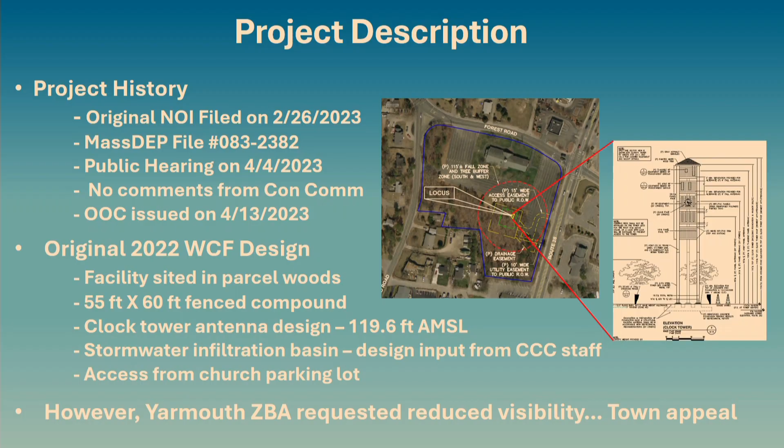What came to bear after is that the Yarmouth Zoning Board of Appeals did request that we reduce the visibility of the facility. In particular, they were concerned about the height and visibility of the clock tower. So with that, Blue Sky Towers went back to the design board and revisited the design.

What we came back with here is a very similar design to 2022. It retains the 100 foot by 100 foot lease area, shown in the yellow box, and retains a 55 by 60 foot fenced compound area shown in green. The infiltration basin hasn't changed in design at all, and access remains from the parking area of the church in the southwest corner. What did change in order to address the ZBA's request for reduced visibility is we shifted the compound facility about 22 feet to the west, which also resulted in going up gradient about 1 foot from the previous design elevation.

The tower design changed from a clock tower design to a 93-foot steel monopole. Total, with the antennas on top, it sits at about 96 feet above mean sea level with the new design. The driveway access into the facility shifted south about 20 feet.

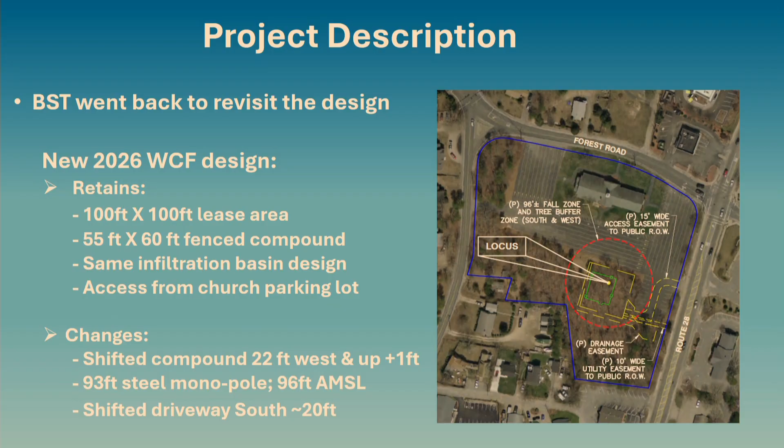This is the new design based on input from the ZBA. You can see the different tower there on the side is not a clock tower design—it's a typical steel monopole design that you see on most wireless communication facilities. The driveway again shifted south of the compound facility.

The stormwater basin is in the lower right corner; that hasn't changed in location at all. The tower itself again shifted about 22 feet to the west within the same footprint.

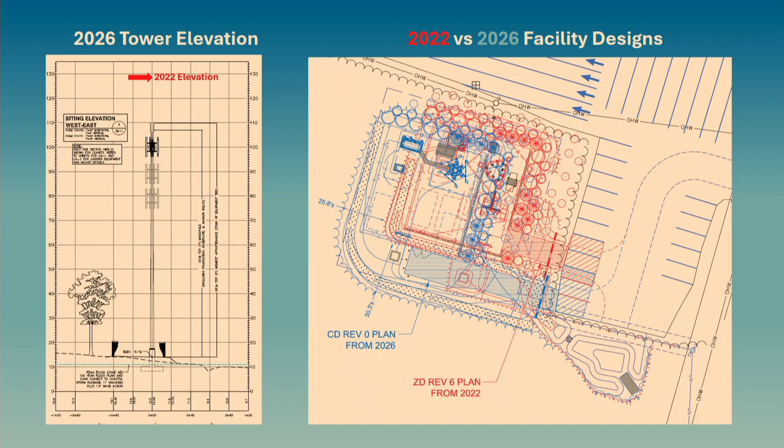Just a quick comparison slide here. You can see the new tower on the left-hand side versus the previous elevation from the 2022 design. We dropped about 20 feet, a little less than 20 feet. On the right-hand side, you can see the revised plan in blue, and it's a bit of a jumble, but everything just shifted slightly to the west from the red, which is the original plan design. You can see the driveway moving to the south of the whole facility versus the red shaded area there. Again, the stormwater facility hasn't moved—it's in the same location.

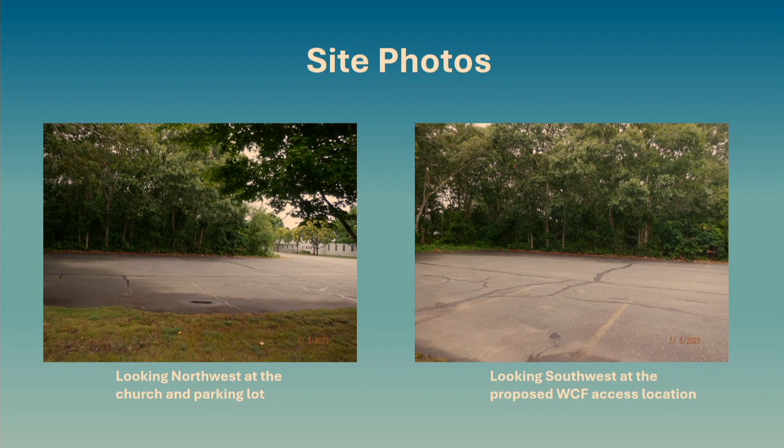Just some quick site photos on the left-hand side. This is the view looking towards the northwest at the church and the parking lot, with the church on the right-hand side. The second photo is looking at where the facility compound access driveway would be located, in the corner of the existing parking lot, heading up into the trees. On the left-hand side, that's where the entrance access way for the facility would be located, the gravel driveway. On the right-hand side is the wooded area where the compound has been shifted up in elevation and, as I said, 22 feet to the west.

Just to recap here in terms of resource areas, we don't have any BVW, bank, bordering land subject to flooding, land under water bodies or waterways, or riverfront area. No rare or endangered species habitat, no vernal pools, no areas of critical environmental concern, outstanding resource waters, or wellhead protection areas. That all remains the same from the original application in 2022.

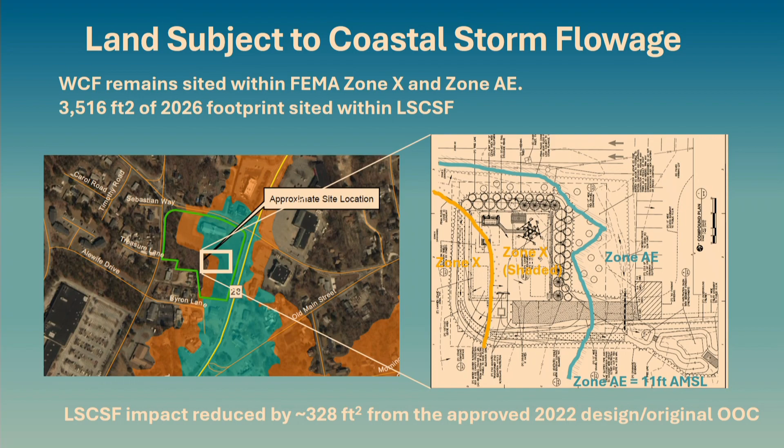Nothing has changed there. What we do have is a portion of the facility remains sited within both FEMA Zone X and Zone AE. So we have about a 3,500, slightly larger than 3,500 square foot footprint that remains within land subject to coastal storm flowage. However, due to that shift to the west, that impact area has been reduced by about 330 feet, just shy of 330 feet, from that original 2022 design that was approved.

Again, just to recap, the design shifts west and upwards about 1 foot, reducing about 330 feet of impact to the land subject to coastal storm flowage.

Stormwater management that was proposed is the same as the 2022 design. Again, that was designed with the Cape Cod Commission's review and input and consistent with their regional policy plan. It has an infiltration basin designed for the 25-year, 24-hour storm event, with no impact proposed on flooding in the 100-year event.

It's designed to treat the first inch of stormwater runoff through exfiltration through the bottom of the infiltration basin. 80% of all total suspended solids will be attenuated and removed. Again, the design meets the Cape Cod Commission's policy, in particular WR 1, 2, and 4, which looks to protect groundwater, freshwater resources, and stormwater water quality.

And again, same sediment and erosion controls and construction BMPs that were proposed in the 2022 NOI. This includes construction entrance, dewatering basins, concrete washouts, and sediment and erosion control that will be maintained during construction.

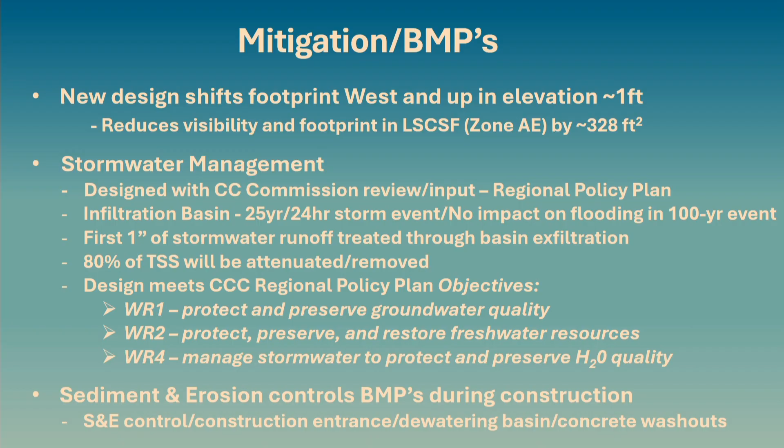Just to summarize, the project will enhance wireless service coverage for the public and emergency services. I'm sure after this past winter you can appreciate the importance of that. The new design addresses the ZBA's and the town's concerns about visibility by pushing the project further up into the wooded lot and reducing the tower height.

Again, no resource area impacts other than the land subject to coastal storm flowage. Similar to the previous application, we've been able to reduce that impact about 330 feet with a new design. Stormwater design meets the regulatory requirements consistent with the Cape Cod Commission's regional policy plan. We have construction BMPs in place, and based on this new design, we achieve the applicant's goals, provide the service, increase service area coverage, and simultaneously meet the interests of the WPA and local bylaw.

And with that, applicant Blue Sky Towers respectfully requests the commission approve the request to amend the existing order of conditions. And with that, I will open it up to any questions or discussion from the commission.

Anybody have a question? Go ahead.

I just have a quick one, for due diligence, since the site was shifted a little bit into the existing hardscape. There's an open-ended note in the documents I want to make sure is okay. It's in the general site work notes, and it says all existing and active sewer, water, gas, electric, and other utilities which interfere with the execution of the work shall be removed and/or capped, plugged, or otherwise discontinued at points which will not interfere with the execution of the work, subject to approval. I just want to make sure, since I don't have utility plans, that there are no surprises underground that would impact excavation or make this work more involved than currently shown.

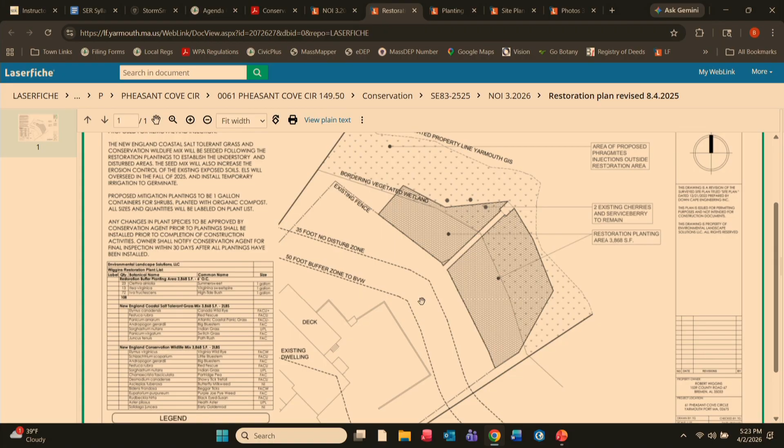So it's a small addition, and it's well mitigated. The boardwalk, our narrative went through it. It would require a variance to retain it, because you don't really allow structures in the V zone.

So we know it's a tall ask, but when you look at it, it's a pretty benign little boardwalk. We feel that by avoiding muddying up that area by walking on it, it probably does more good than harm, especially when weighed against the amount of mitigation that you're getting in return. So that would be the request, and I'd certainly be glad to go through any of the points and answer any questions.

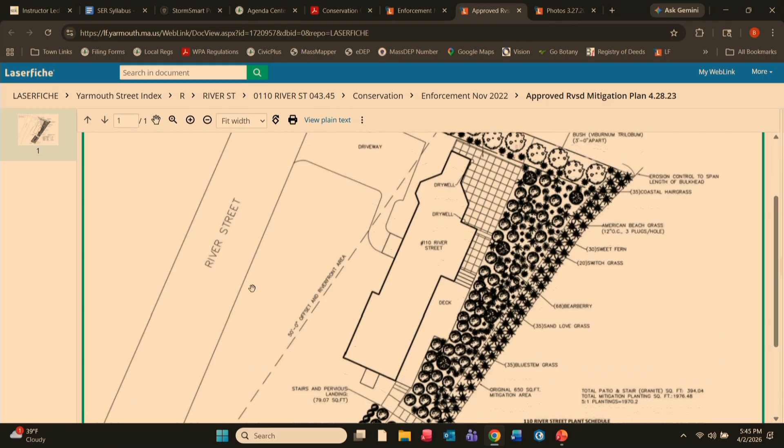The top two rows are missing, so it has to be planted fully, not just maintained. That's from 2023, and he's missing monitoring reports, so we'll need monitoring reports for two falls, this fall and a subsequent one, since he'll have new plantings, in order to resolve the enforcement order. So he still has work to do? Yes, we're missing some plants.

Okay, let me work with you on that separately. You see the landing here? These two rows on top are missing. It's about 10 shrubs and some grasses, a row of shrubs and a row of grasses just needs to go in to complete it. Then just let it go, don't need anything else. Two falls of monitoring, since he hasn't done any monitoring yet.

But you're approving the COC then? Well, yeah, the COC was just for the bulkhead replacement, so I don't have an issue with the COC. Now I understand, okay, thank you. And you wanted to have the plantings done by June 10th? Yeah, they should go in this season since it's a couple years old, to finish it out. So to be clear, what we're voting on is the COC for the bulkhead, and the other is just discussion and needs to be done.

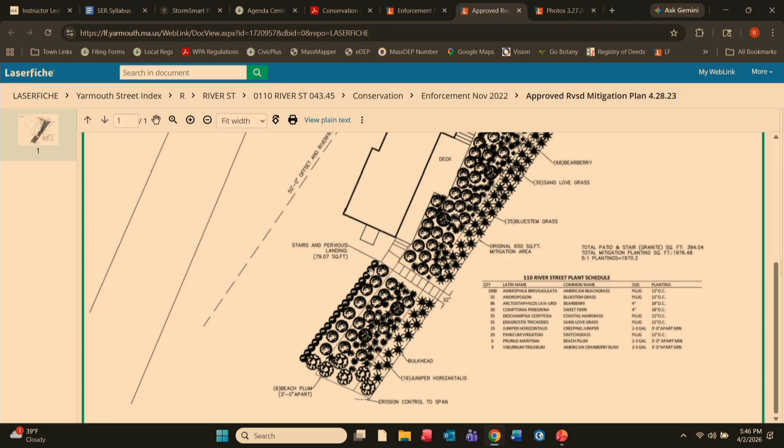Okay, do you have any questions? No, go ahead. I'll move the approval of the proposed reconstruction of the failing bulkhead with conditions. Do I hear a second? I'll second. Christian, aye or nay? Aye. Aye. Aye. Aye. Aye. Thank you, I vote aye.

See you in a little bit. And Brittany, oh, you can stay. The next one's continued. I'm sorry, what? You can stay there, the next one's a continued item. Oh, I had you back to back theoretically. Okay then, see, we're getting through this just for you. Did I mix this up? Oh, I did. Oh no, I didn't. No, you didn't, you're okay.

All right, next is SE 83-2514, Crawford Land Management for Scott Peterson, 10 and 20 Susan Road, proposed bank stabilization using coir fiber rolls and invasive tree removal in coastal bank and land subject to coastal storm flowage. They asked to continue to 4/16/26.

Do I hear a, did I send something down wrong? Yeah, that's for this one. Okay, the continuance request, yeah, just went along with it. Why are you putting that in that folder? You just put that on the side. That's Surfside, I don't have a folder for Susan?

Okay, there we go. Do I hear a motion to continue? I move that we continue to April 16th. Okay, second, anybody? Second, Jack. Okay, again, Christian, you accept that? Aye. Aye. Aye. Aye. Aye. Okay, great, like those easy ones.

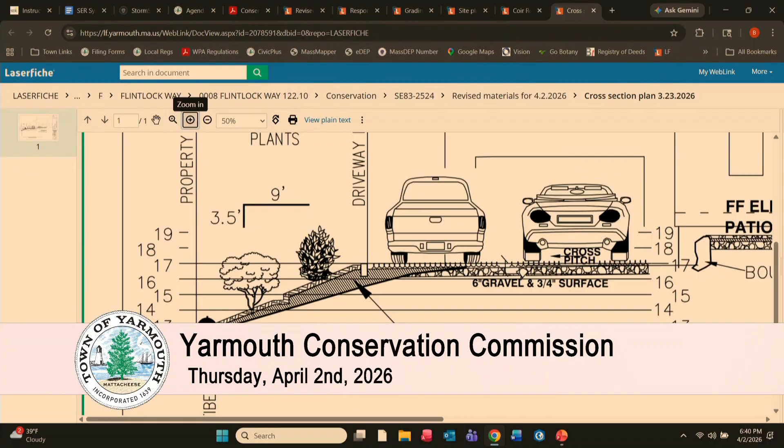Brittany? I'm just going to assume that the fiber roll is dug in halfway as it's shown here. Is that the intention? I'm not familiar with any use of these apart from coastal stabilization, but if this is what the homeowner wants to do, I'm sure that'll be fine.

And I would be happy to approve hand clipping of vines from the coastal bank mitigation plantings so that the homeowners can try and keep these separate. But otherwise, thanks for making all those revisions.

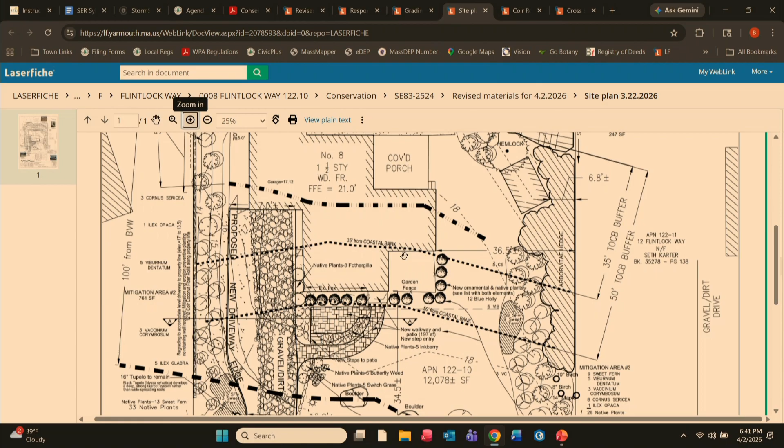Okay, thank you. Anybody in the audience? Anybody online? Don't see anybody? Do I hear a motion to accept with conditions? So moved. Anybody second? Second. Start with Christian. Aye. Aye. Aye. Aye. Aye. Aye. Okay, thank you.